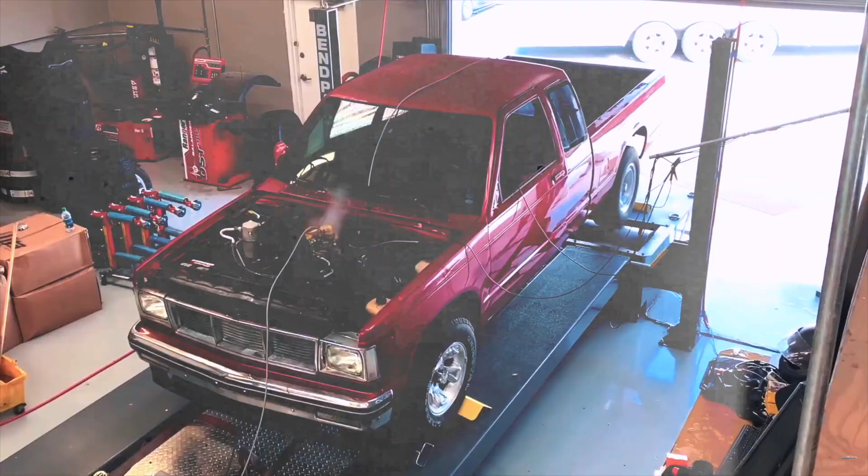Look how clean that chain is, dude. Matt Hurley, man, you're the man. This came off your C6Z06 a long time ago, and it's still kicking. I like your nice workbench here, and a nice parts cleaner.

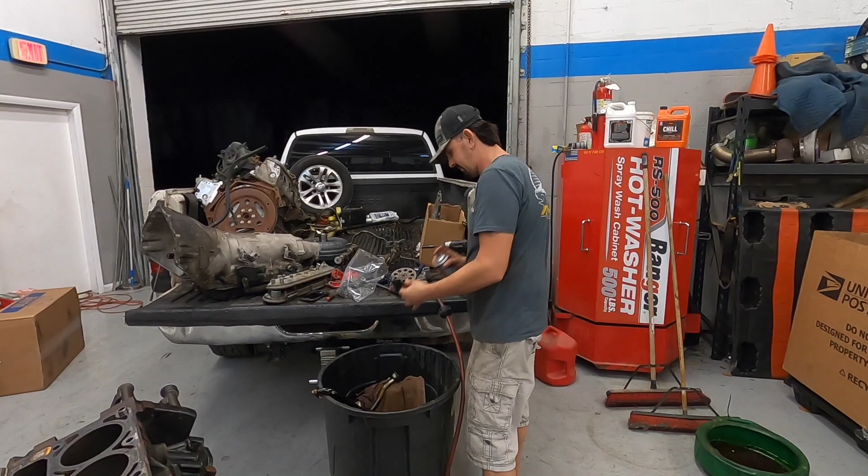I gotta hurry up and get done before Juan gets here. Oh, Juan's here. Josh is waiting on Juan. That's my table, a little brake clean. Got my arcs here. You got the oil pump out here or no? No, it's on the table over there.

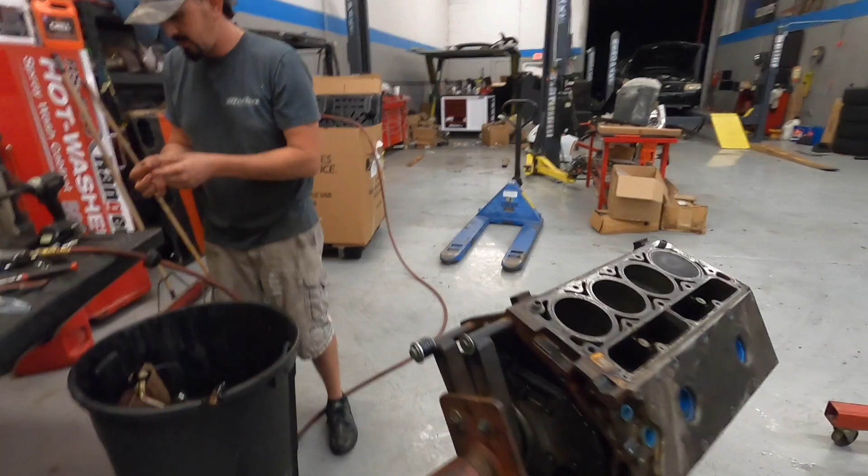So Jeremy came down earlier. We want to try to get the handbrake in roughly that position in front of the shifter. The thought is he can load it on the handbrake at the starting line, slip off of it, and he'll be right on the shifter to go from first to second. And this thing has a super short first gear, so I'm gonna work on making a bracket for that and see if we can get that mounted up there.

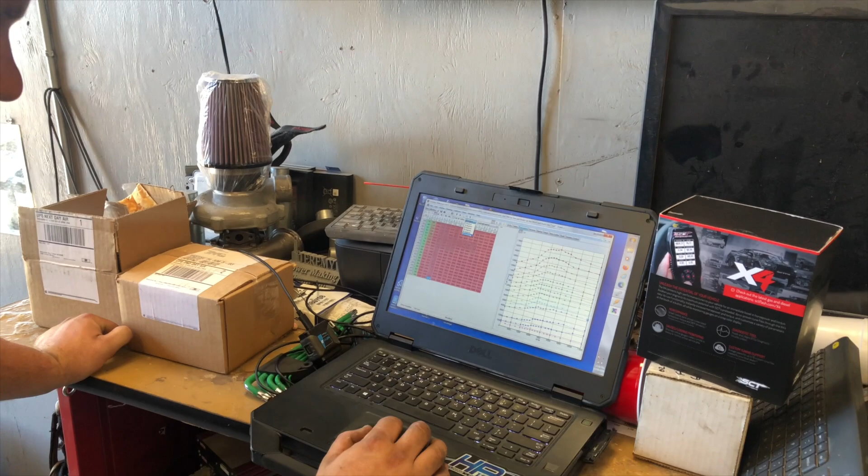All right, today's my lucky day. Jamie happened to be next door here, and we're going through some stuff we had some problems with on Katertot. We were making some really aggressive 60-foots, getting everything straightened away, and then we had our fuel enrichment problem. So with that fuel enrichment problem, Jamie's going through and checking some things out, saying hey, maybe this might be it, trying to smooth everything up.

We can always, at worst, revert back to the original tune of what we had, but we made some small changes, and we kind of felt like this would be the way to go. So I'm learning some Honda stuff here, but I'd really rather let somebody that is good at and fluent at what they do, do their job. That's a lesson I've had a hard time learning way back when, but I definitely stand by that now.

At least you're doing it. You're just diving right in here doing it, man, knowing the quick keys and everything and knowing how to get through it. Yeah, I mean, I was pleased with some of the stuff that we did, and it felt like a noticeable pickup of torque down low.

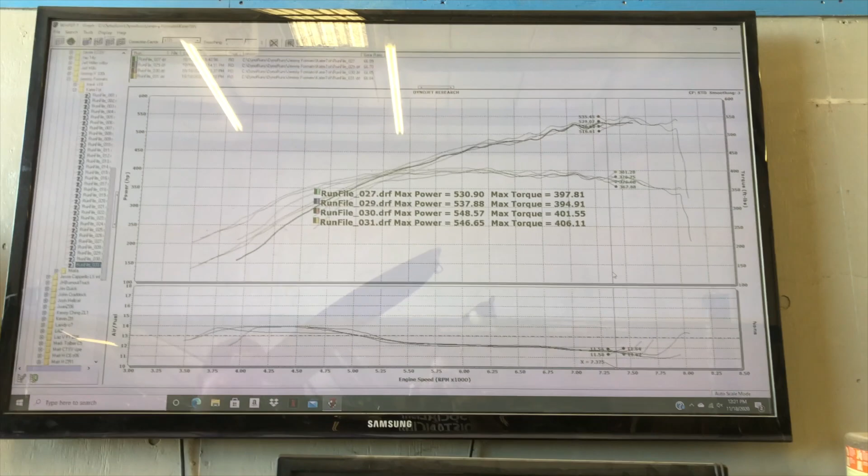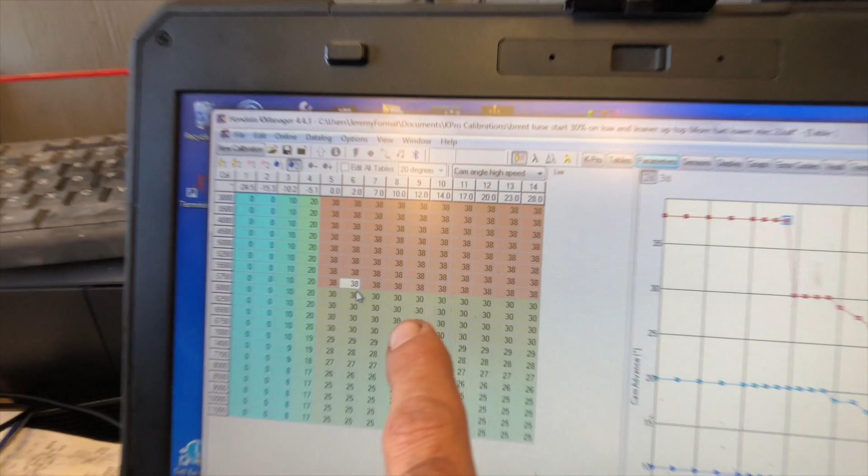Yeah, actually let's check that out. So those waves up there, without having a data log, it's hard to tell, but if your boost wasn't fluctuating or anything and your fuel looks pretty good, that's something I'd probably start looking at your cam angles. That's like 5700, which is where it takes a large jump. Yeah, from 38 to 30. So that's where you can start interpolating this down some, maybe bringing this up a little bit. It could go either direction, and you might find a bunch of power right there.

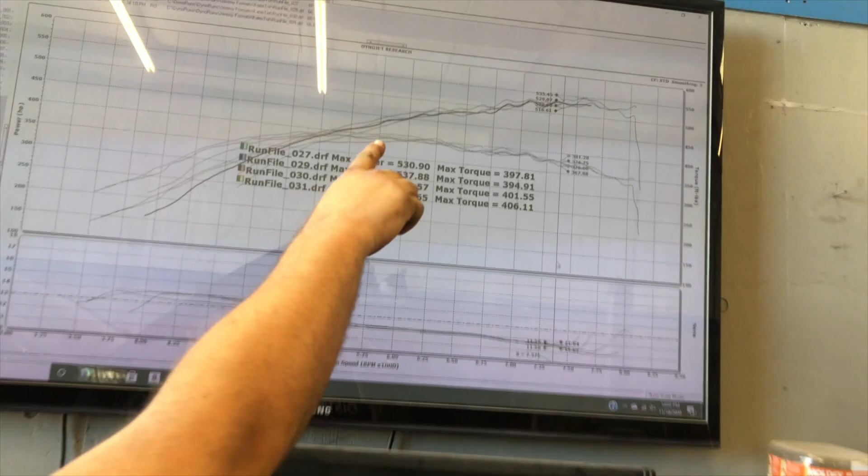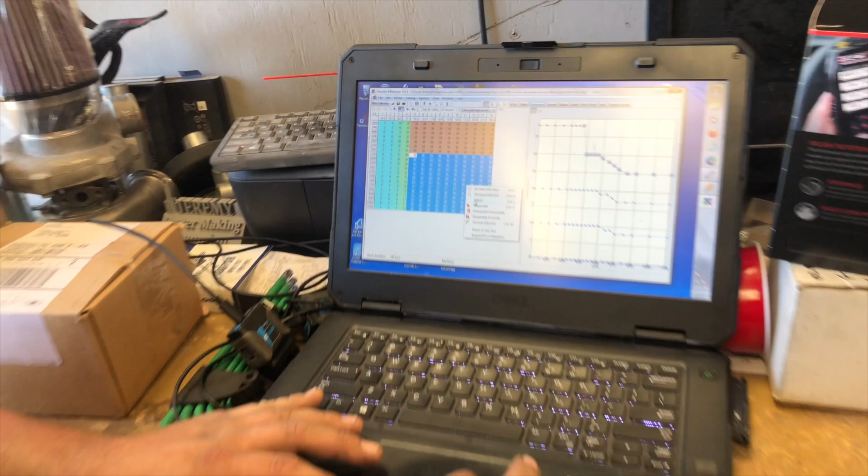Because see, it kind of starts hugging down. Yeah, and it actually looks, like that's a drop right there, where it comes from that higher angle down. So you can even do this right here and interpolate it to where, see, it comes out, but just a lot more gradual.

Now, see, I thought it might have been spark advance, and I moved the spark advance ever so slightly, had very marginal results. Yeah, I mean, we did have small pickups there, and I'd probably attribute the only pickups we have in that area to that. But we're talking a half degree to a degree, and I didn't want to lean on it too hard. We've got an E85 with a C16 blend, so we've got a pretty high average octane.

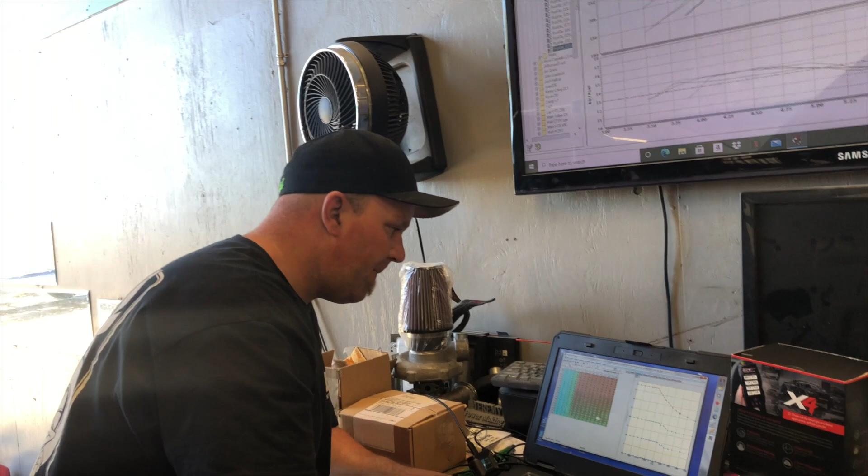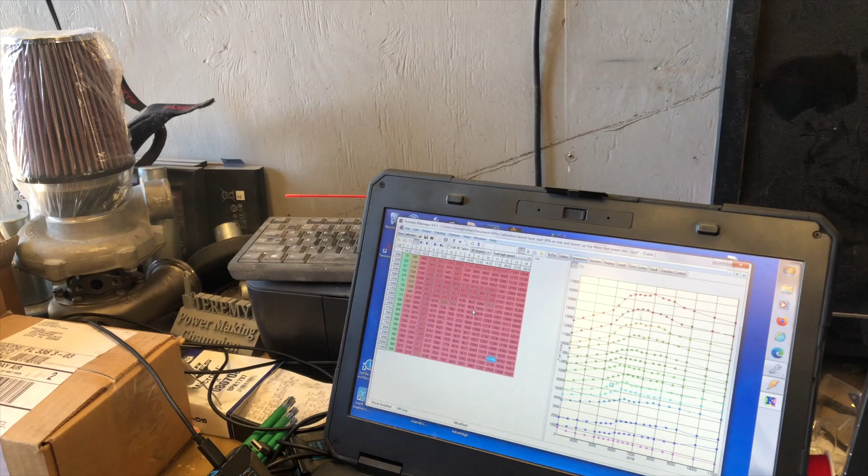And then I showed you how to go through and check the fueling between the different cam angles so you don't have big jumps, keeping it real close, like pick a number here, make sure when you go to 30, the number's pretty close. Now, when you start actually tuning each of those cam angles, you might start seeing you need a little variance, but starting off fresh with it, you don't want a big variance, especially without a data log.

Because you could be in that lean spot when you shift gears. It could just be the difference between the 30 and the 20 degree map, whereas you're trying to pull it out of the 30 degree map or give it in the 30 degree map and you're not doing anything. So you're not even in the right zone altogether. I see exactly what you're saying. So if you make it all the same to start off with here, then you can make a change on one, move it to all of them.

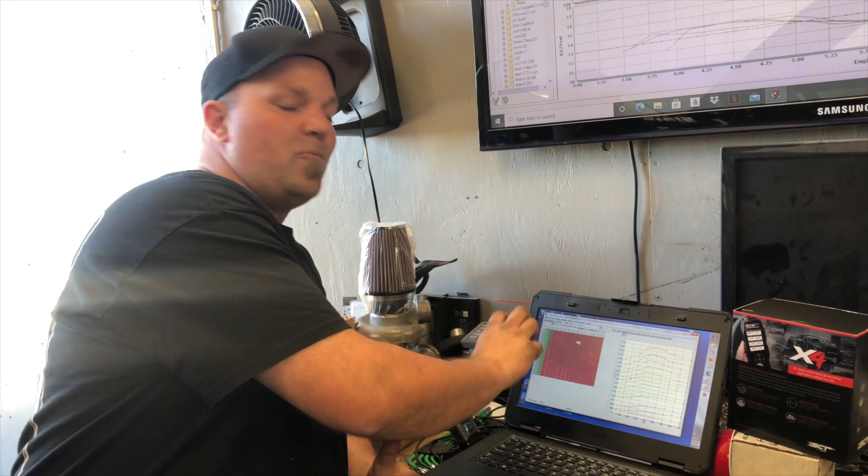We'll try, and we got a lot of work to do here. If you hang around long enough, we'll try and get you to go for a ride here. So heck yeah.

Earlier when you guys saw Jamie, he was helping me out a little bit with the tune, and both him and Brent said one of the things you absolutely have to do is get a handbrake in order to load the drivetrain instead of shocking it. So Laz has tackled this. I sat in it a little earlier and was busy with something else, forgot to film some stuff, but Laz has been really busy and gotten very far very quickly.

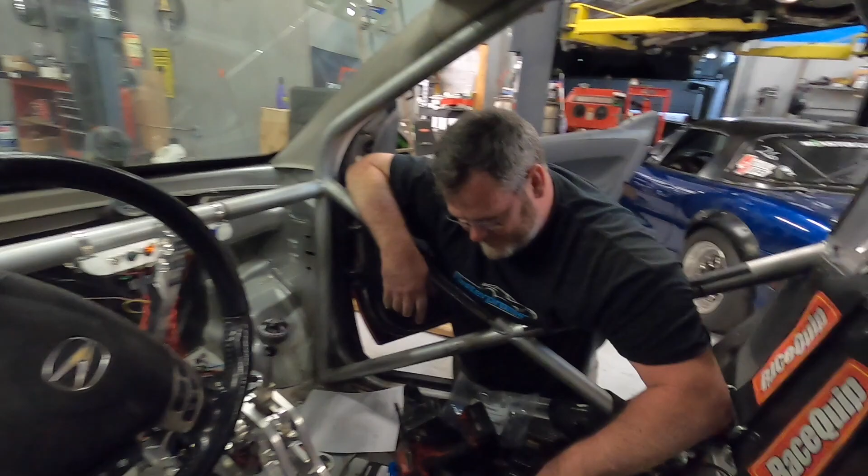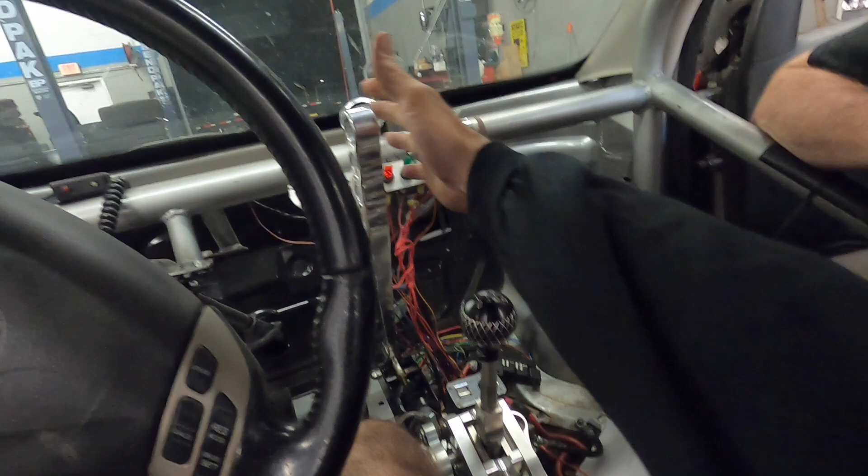We're kicking around the different positions for where we're gonna put it. We even tried it over here, like the OE handbrake type thing, but you're worried about going from first to second. All these other positions didn't really seem totally right. But if we're right here, I think it's an easier transition into second. It seems weird, I've seen other people do it, but I've never done it personally.

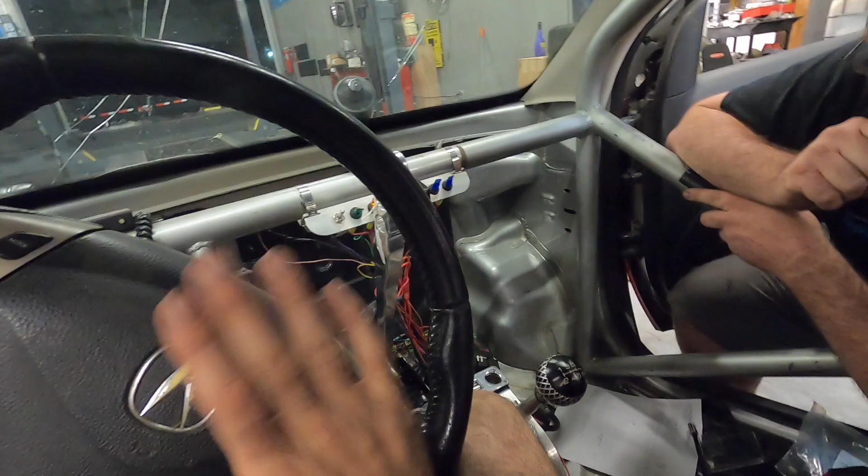So go through and tell them everything you gotta think about. We absolutely love this K-Tune shifter, however its positioning is a little bit funky. Whenever I'm driving I'm hitting it in like 4 spots - here, here, right here, and my foot is also hitting right there. Now my foot's hitting there too, and I'm hitting here with my knee as well, it's just not all that comfortable. I'm trying to make the best out of it. Realistically we probably need a smaller wheel. So your hand shoves your knee into the steering wheel - yeah, there's just not a lot of real estate in here, plain and simple.

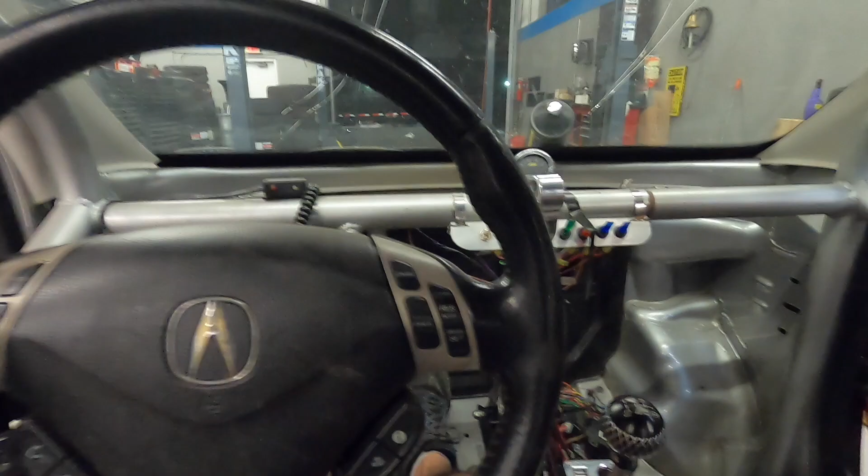We arrived at this right here, looks like this is going to be the best overall. So I got to hold my 2-step, go wide open throttle, try not to knock that off, and then while I'm doing that I got to be holding the brake. I got a feeling I'm gonna mess up a handful of times before I get this whole mechanism down. It's what needs to be done to really get this thing to leave and live. Getting it to leave, we're starting to figure that out, but we haven't figured out how to make it live yet, so hopefully we can keep it from shocking the drivetrain and snapping axles.

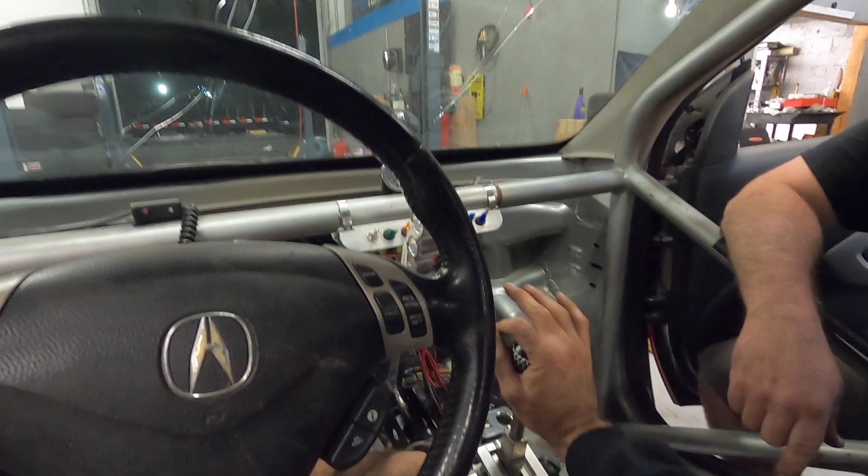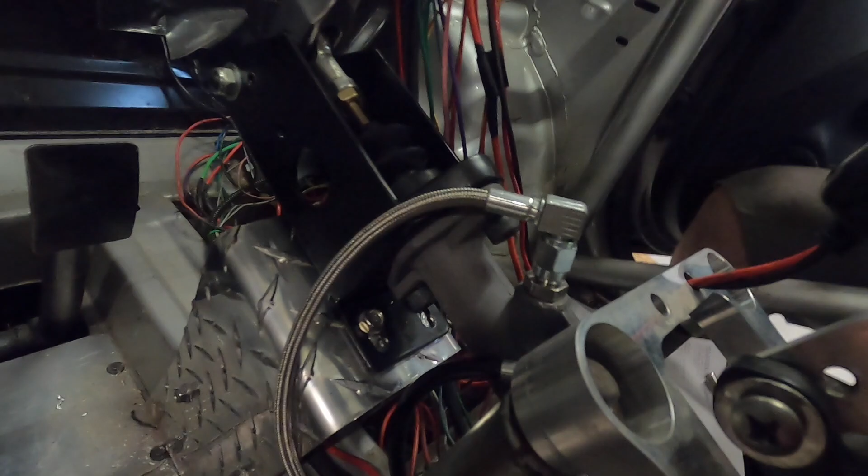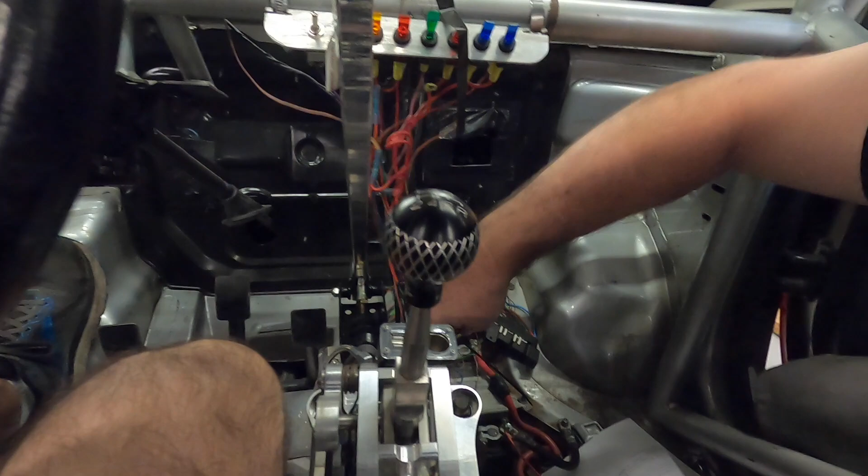You won't have that much time between first and second gear though. Yeah, you're right, absolutely. Check this out, I got to use my SWAG Off Road bender - oh sweet, haven't been able to use it too many times, nice little tight bend on that. We're gonna run one more brace coming off the front of this because you're gonna be pulling back on this, and we're gonna run a little bit of... Well I was gonna move this forward and put all 4 into this, but we need to have something strapping it forward, and then we're gonna try to move the shifter over a little bit. Probably not this round, next time we get inside here, bleed this, and tomorrow we need to figure out our fuel signal from the PCM.

The weather is so nice here in Florida right now, it's a really cool night, somewhere in the 50s, and we wanted to go to the track. However, we just got done with one of our other projects - 4 big projects today, yeah we literally have. We are making great progress on a bunch of different things.

I think we're good to go. You got to make the noises.

But see, look, I gotta walk you through the process already, you messed up. All right, go ahead, I'll let you roll. Go ahead, pre-stage. Okay, get on the brake. Roll in and yank on it. Okay.

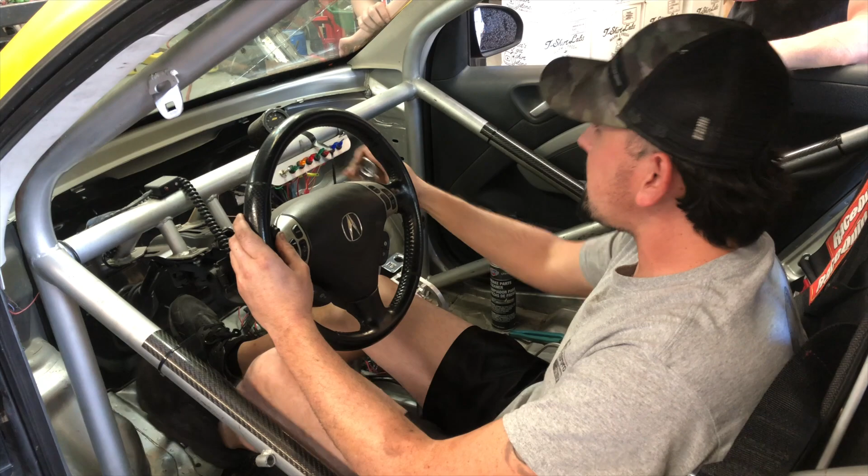That's about right, yeah, about right. That was about 4 times too long in first gear, just to be honest here. I'm new at the Honda thing, but when you come into the end of the track, you got both brakes. Both brakes? Both brakes.

Pretty much all day yesterday we could not get that brake to work right. We can't get this brake to work without pushing the brake, so we're obviously doing something wrong, or we were thinking it was the master cylinder, but when you hit it, it's like it needs some kind of a check valve or something. I don't really know, it had a couple leaks, I think we got them all fixed. Well, is it soft right now? Just because that bled looks kind of soft.

Yeah, if you don't pump the foot brake, it's no bueno. I don't have confidence in this yet. But we got brakes. Thing is, when I close the back brakes, the front brakes are there. That's how it's supposed to be.

So from the back, something's happening. Last minute steel preparations. Lines, we got metal tubing and AN, good brake lines. There's no flex. So we've been bleeding them over and over again.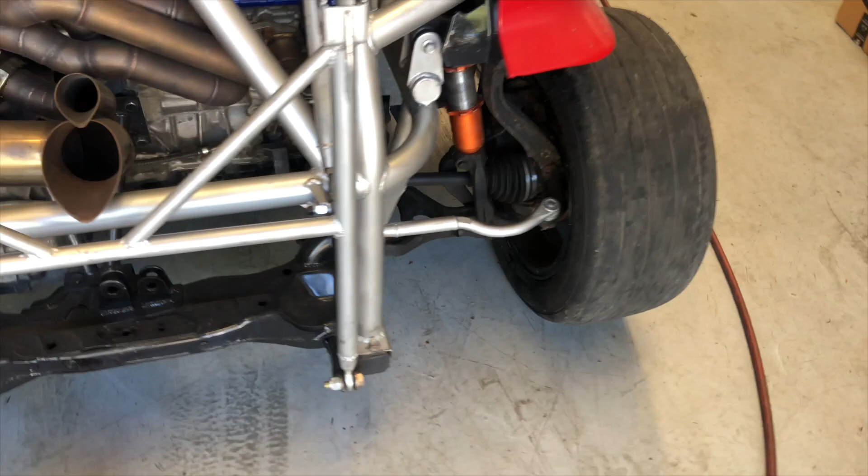Are we introducing any air anywhere? I mean, not that I can see. I've been spraying it with brake clean and blowing it off. All right, so that's an ugly fitting right there.

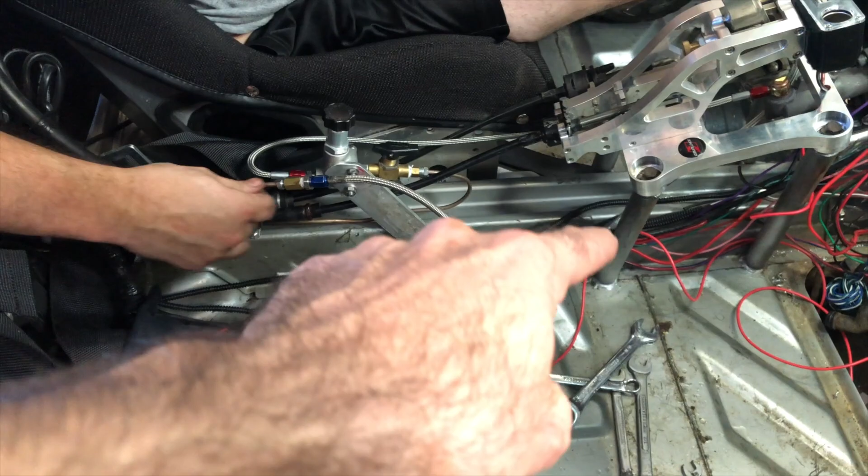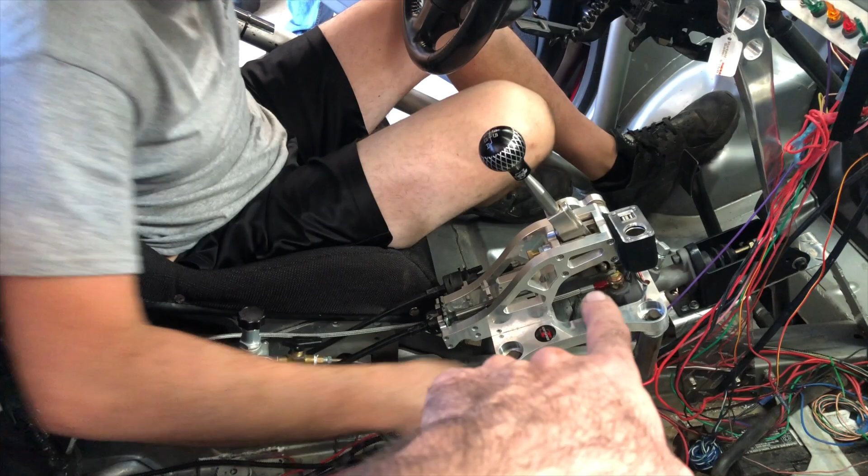We had a line coming in here. Deal with that. There's no visible leak anywhere, right? No, but we had a leak here yesterday, so we had to change something. I thought that banjo fitting over there was a little bit messed up. Laz had to get a different one.

I thought once we got that, everything was going to be fixed toward the front. But it's back feeding somehow.

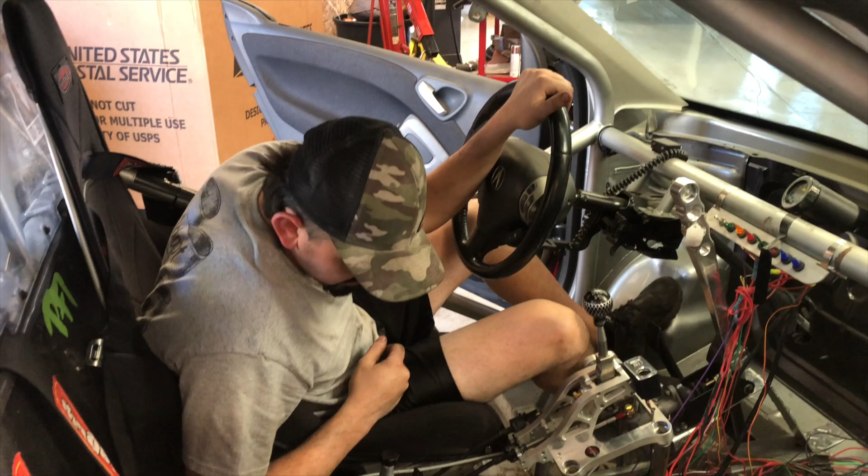Well, it's going to be a little bit to get used to, but I'm gonna try. So it actually is — you can launch it. You just pre-stage it, pull yourself into the beams with the back brake.

I need to go out and test it before I go. Now's probably a perfect time. Now? It's early. People are still sleeping, now's a good time.

And that never happened. We had a number of other different problems, which we're about to show you. As it would be the last day before an event, there's a whole bunch of other shops around here with LS stuff, and they came by like, hey, can you fix this? We got a problem. Everything pushed back, and it's about 9 o'clock and we're still working here, so stay tuned.

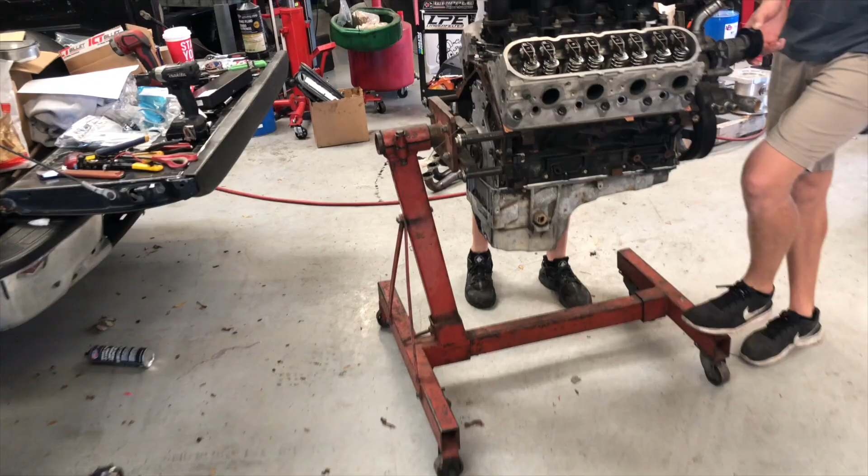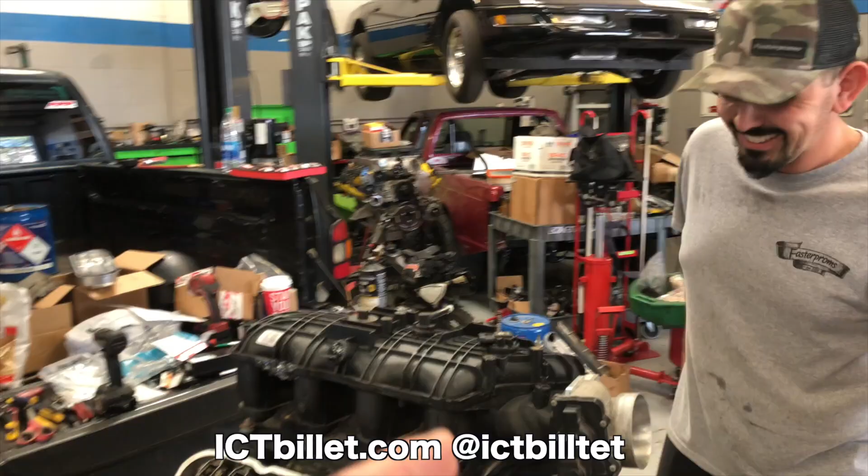So we want to put this big dog TBSS intake on here. You might be wondering how I got that 3-bolt throttle body on there, ported by yours truly. I'll tell you how — ICT Billet. Made a phone call, they said, oh yeah, we'll help you dominate that burnout contest, dude. And they've come in clutch so many times for us, literally overnighting stuff in.

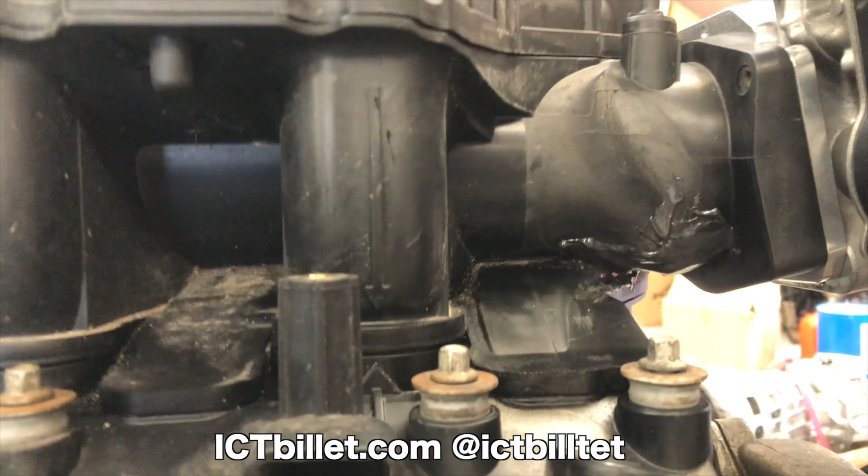Yeah, we didn't know we had this problem. Hold on, we got to cover this for a second. This intake was wrecked, just totally snarled up. You had crack after crack — JB Weld some of it. Got the doctor on there. It'll work. But to church this kind of ugly motor up, we also got some other parts.

I said, hey, you guys got some valve cover gaskets? They said, hey, we'll do you one more. Boom, those are beautiful. I said, brother, that's doing me one more. Look at that. Totally — wow, wow. Things are turning around after blowing it up on the first start. For reals, for reals. Now the wave of pity came in.

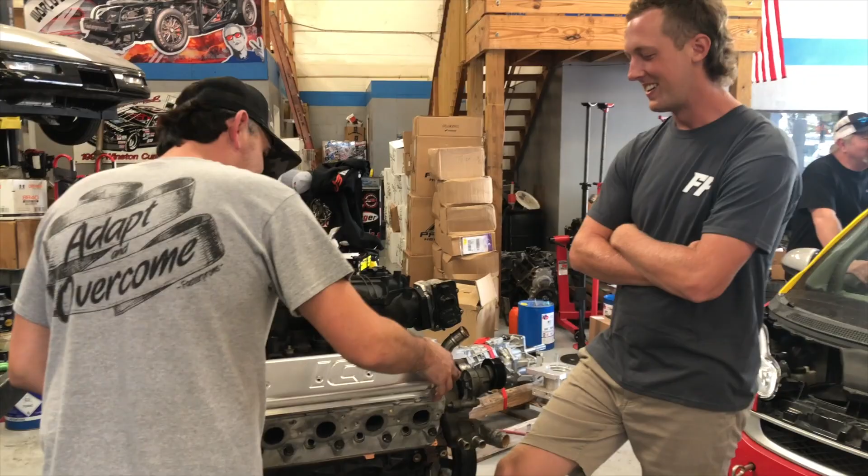Fire me up. Dude, I know, look at that unit, I'm so excited. A lot of stiff competition out there, but you know what — ain't scared. You should be. Yeah, I think we definitely got a top contender coming together here. It's just whether or not you can get her done.

It's tomorrow morning and it's already this afternoon. And hopefully we got a nitrous kit coming in tonight that's probably going to be last minute. We'll probably be tuning it at the track tomorrow morning. That's okay, yeah, you can tune it while you're doing the burnout. Perfect, you gotta tune it for the burnout — live action. Wow, be in there like the turtle man on the laptop.

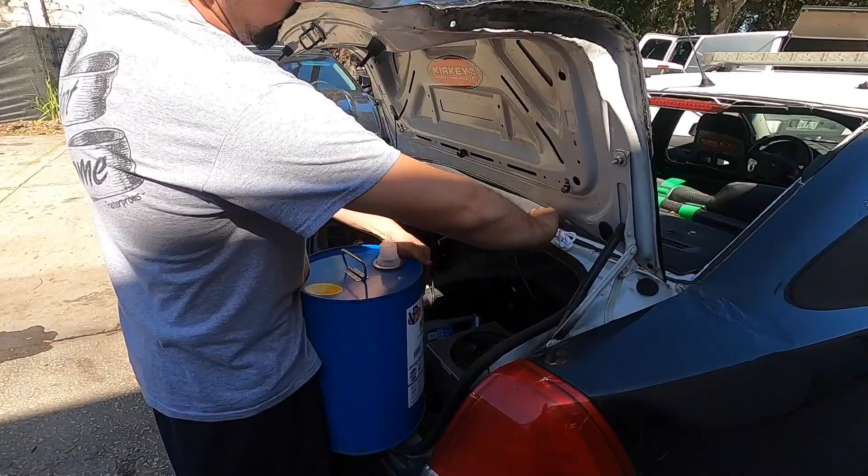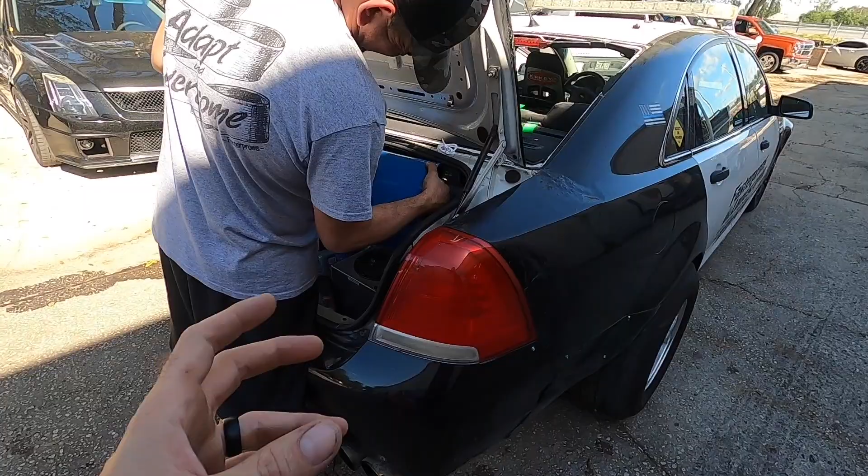Many a last minute preparation. Dude, going through a burnout competition is honestly some of the most stress on a car. It really takes a toll on it. I had really underestimated how much of a beatdown that is on a car, but judging from our exhaust and how we melted the bumper, and how it was just freaking toxic orange under some of this stuff.

Dude, there's no cooling going on whatsoever, so we're heavily dependent here on methanol. We're just checking it, topping it off, making sure everything's good to go. If our intercooler pump took a dump, it would be game over for this Texas Speed 427, dude.

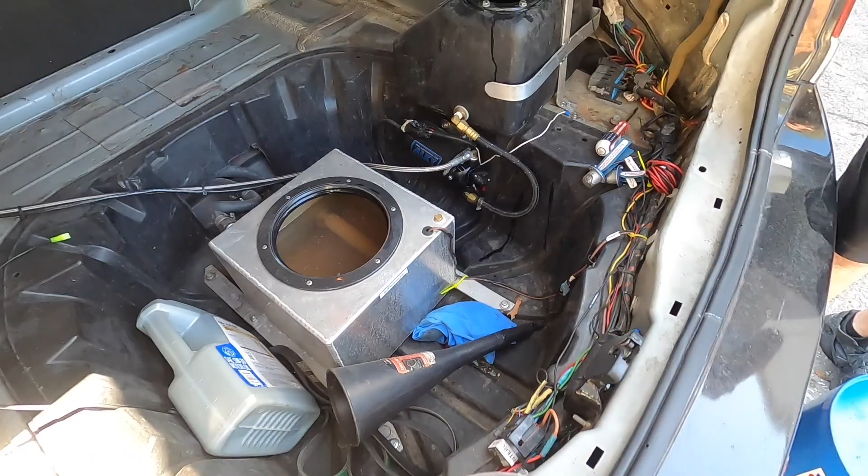Oh my goodness, we shouldn't even talk or think like that. No, we're not going to think like that. We're going to make sure everything's good, make sure that doesn't happen. Best we can, yes sir.

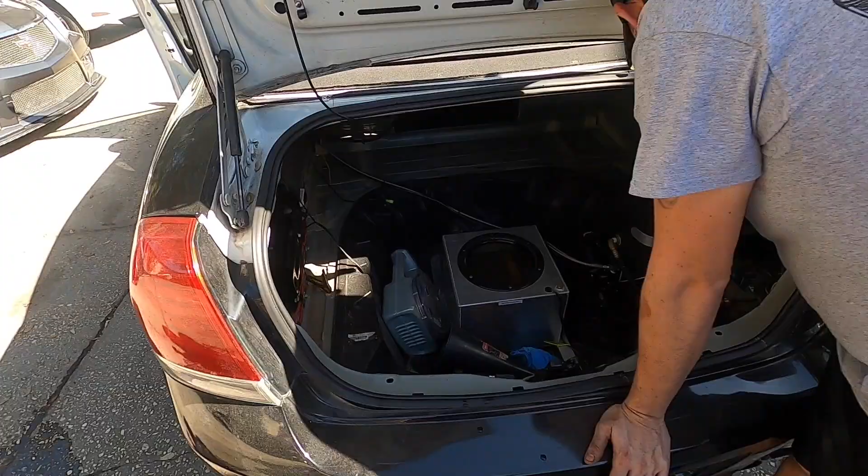I'm going to go get some water and top off that, better to have a little bit too much on there. Everything else has been really, really good with Sam. So we're going to go take it for a rip, do some drag racing stuff real quick here, get it ready for a burnout competition. So we want to do some strip stuff before the burnout competition. Last minute preparations here, let's just check everything else under the hood.

Milky oil there. I'm gonna probably see, we're probably gonna need to do an oil change here.

These are the ramps that we've had for probably 14 years here, and I wanted to give a huge shout out to Race Ramps. We just got some ramps for our trailer that make it a heck of a lot easier. These things have been awesome. An old Cleetus had to go beat them up, put them on a dually that already had a car on it and smushed them all up. Definitely exceeded the weight limit on them, but I love these things.

Got all of our other lifts all tied up and everything else, and it's just too much, man. Yeah, we got to go back to the race ramps.

All right, so running E85 the way that we run it, oh yeah, that does not look good, man. It looks like a milkshake, and we don't want to have boys in the yard. Tastes like corn.

Oh, the red one that's on there. Yeah, that's so sick. All right, so we just checked our test button on our alky control right there, and checked it back here. The pump is working okay, the light does come on green. Small problem.

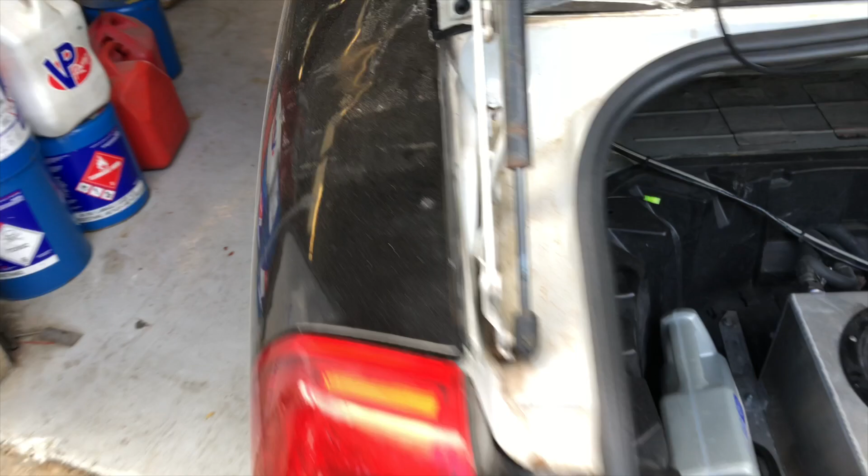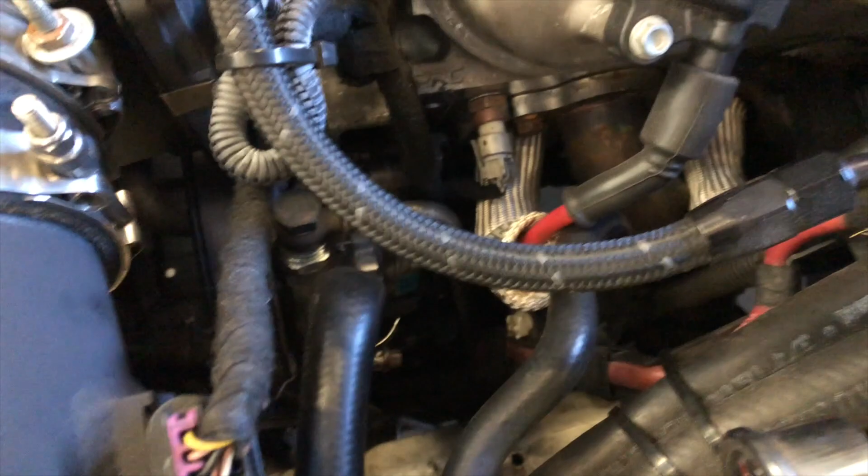There's nothing coming out up here, so we either got a clog in the solenoid or a clog in the filter. So we're gonna pull that off and then try and redo it again. We thought that we fixed this, we took this thing all apart and it worked for a moment here on the bench. Then we went out again, had the same problem again.

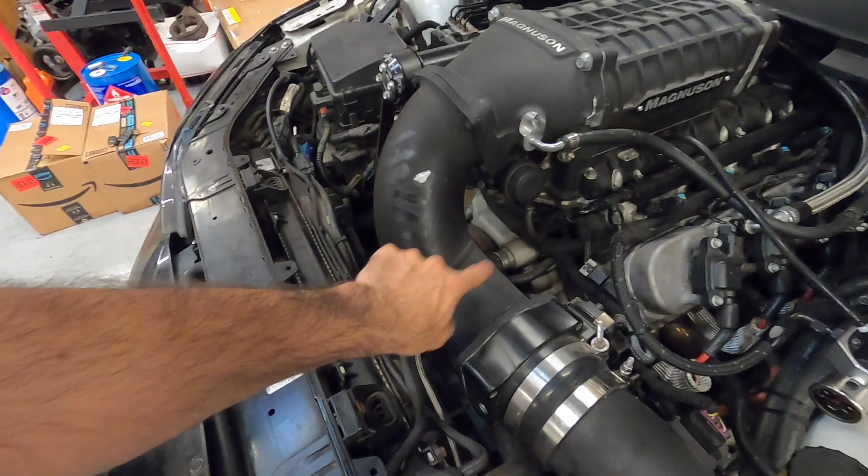Turns out it was a solenoid, and the only reason we have this problem is because we added it. Our meth nozzle is on vacuum, otherwise it would suck the tank dry. If we had it in front there, that wouldn't be the case, but we have our mass air there. So it's there for a reason.

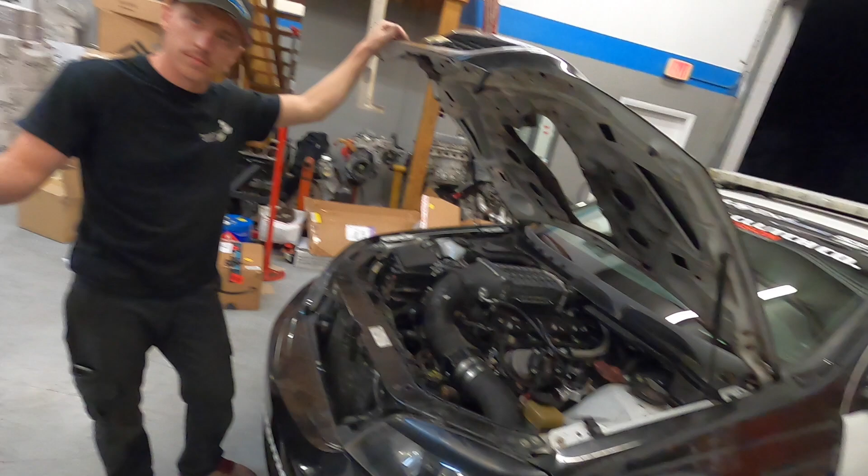Unfortunately, these things happen. So you just went and checked it. In fact, I think you should just go take it for a quick little rip yourself. Say no more. While you do that, we got to go check on George here.

All right, we got the Moonlight crew here. Calling in all the favors? Yeah, dude. Cleetus and cars is in a few hours, so.

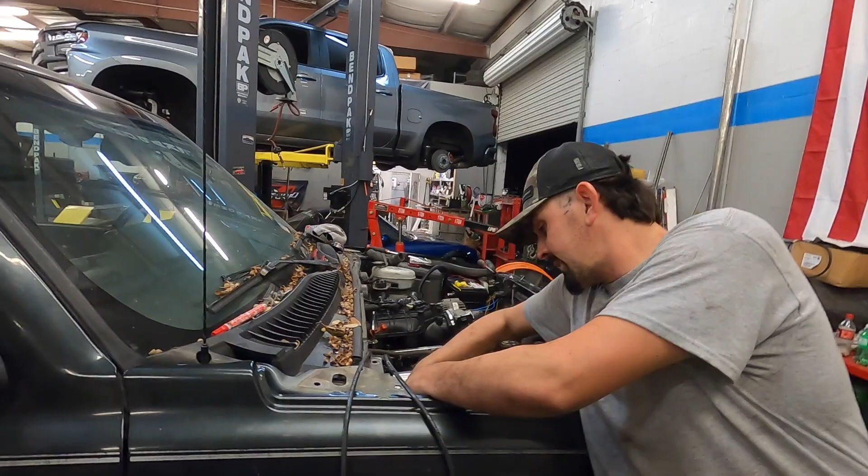All right, so we had a nothing major crisis here real quick. Just run us down. So, lack of paying attention. Put the motor in, got everything bolted up. The trans was kind of hard going together. I'm like, man, it just don't feel right. Been in that position before with the long crank situation. And come to find out, it wouldn't go together.

I called Jack Stain. I'm like, dude, what's going on here? I'm like, you think it's the converter, because on the converter it's got a big weld around it. And he's like, does it got a pilot bearing in it? I'm like, oh dang, maybe it does. Had to take the trans out. Sure enough, pilot bearing, had to jam it out of there. Thankfully it came out very easy, because sometimes they're a pain in the butt. But got it out, got it in.

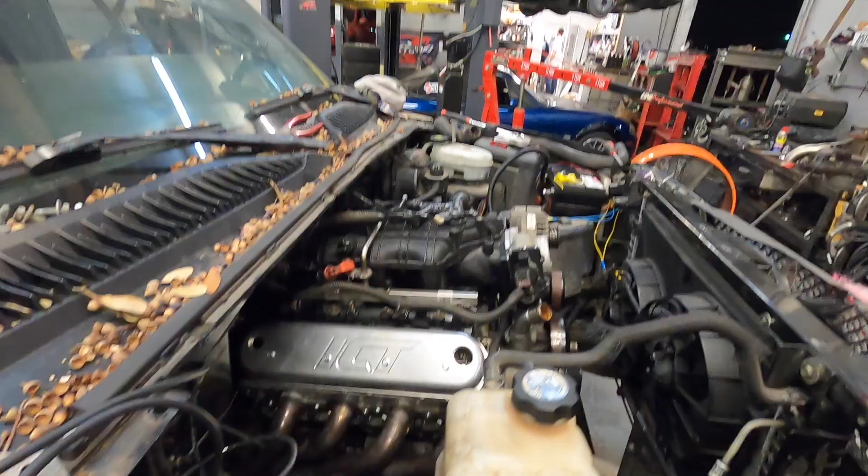ICT billet valve covers on there look sick. So sick, dude. Yeah, we just gotta get the acorns up. And we got this stinking 4 to 3 bolt adapter there, so that we can run this later model intake that makes a lot more power on an earlier model engine.

With the ICT billet valve covers, you need custom spark plug wires. They sent me the freaking coil relocation, dude. I've wanted those for so long for the other truck. Now I'm getting all this nice stuff on the dang hand me down. Well, you know, not for long.

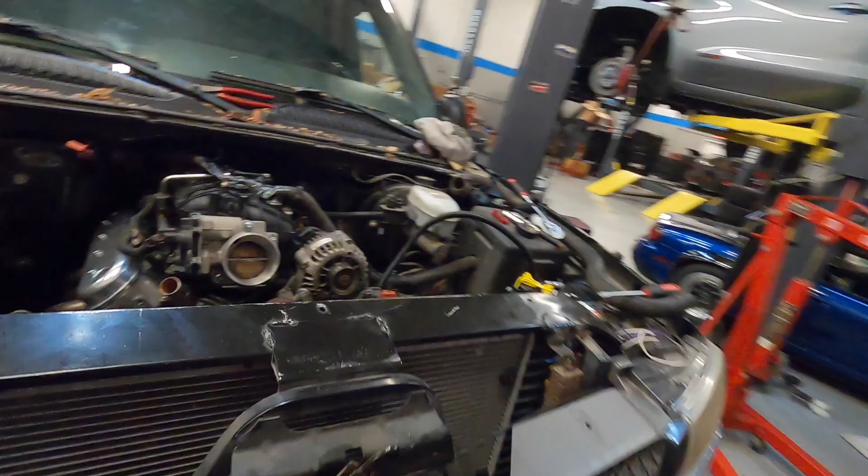All right, so now hold on, George, we still have more crisis that we have to address here. More of a crisis, dude.

All right, so this is 9:30 p.m. here. It's been a pretty long day, but it's gonna be a long night because we overnighted our nitrous kit, and well, it happens all the time. Got delivered to your house instead of the new shop. Yeah, where the old shop was 3 years ago. So we've been ordering stuff from Nitrous Outlet for a long time. However, little miscommunication. Unfortunately, that's going to cost us a little bit of an hour. However, we got plenty of stuff to do here. This is all coming together.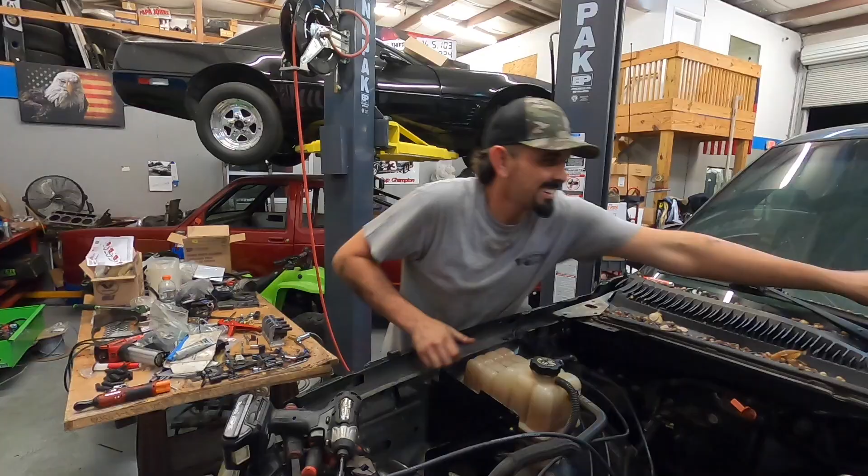So we had to send the runner man down to Jeremy's house to pick up the nitrous kit. He'll be back in probably about an hour. Dude, when he gets back, oh, I can't wait. I have to wait, but I can't wait. But I will. I hope it's not the same nitrous kit that we put on the Miata, because it ain't gonna happen. Yeah, it's a nice kit. It's not as complex as what we have on the Miata, but it is a very, very nice kit. And it's going to be something that's also going to be safe.

Right, you don't like plate kits? Single nozzle. Yep, so, right in there. Guys, we are working hard to make this happen.